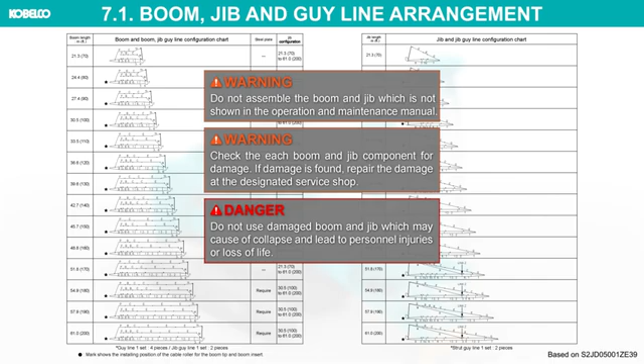As for the luffing crane specification, place the steel plates between the ends of the crawler and the ground when erecting or lowering a boom if the boom length is 54.9 meters or longer as shown. When placing the steel plate, travel the crane forward until the idler center comes to the center of the steel plate.

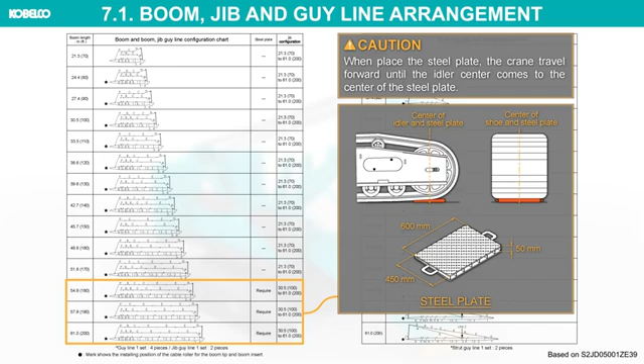This video describes the following attachment configurations. Boom, 21.3 meters. Jib, 21.3 meters. Hook, 35-ton hook, 2 parts, plus ball hook, 1 part.

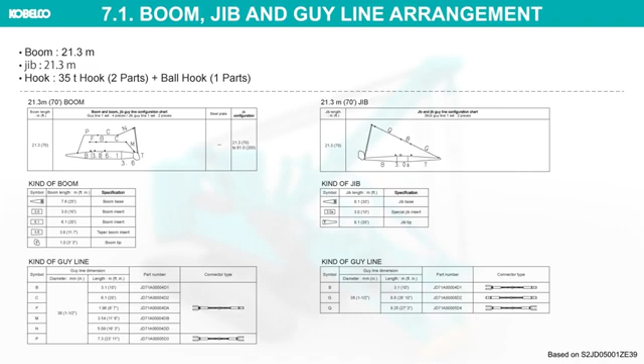Caution for cantilever. Ensure to work with the gantry set at work position, and the inching switch should be set in inching position. Do not exceed the cantilever limitation. Do not perform the hoisting work or travel while the boom is supported with the cantilever.

Hoisting a boom until the boom tip is cleared off from the ground will lead to damage to the boom. If the pinholes located in the lower sections of the booms to be connected are aligned, the boom should not be hoisted further.

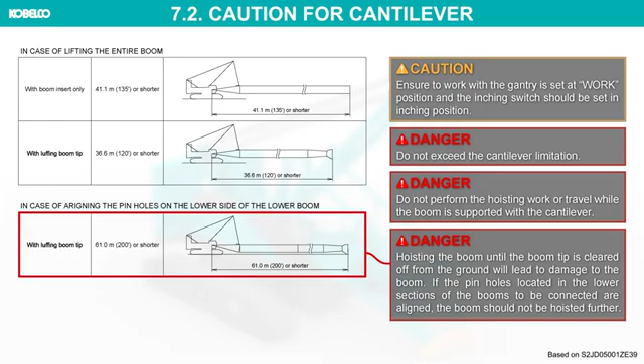Assembling the luffing attachment. This assembly procedure starts from the machine under the following conditions. Do not lower the boom base tip below ground level, otherwise the boom and/or backstop will interfere with surrounding components and lead to damaged parts.

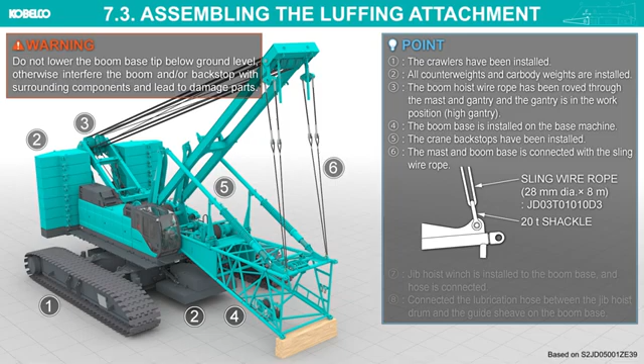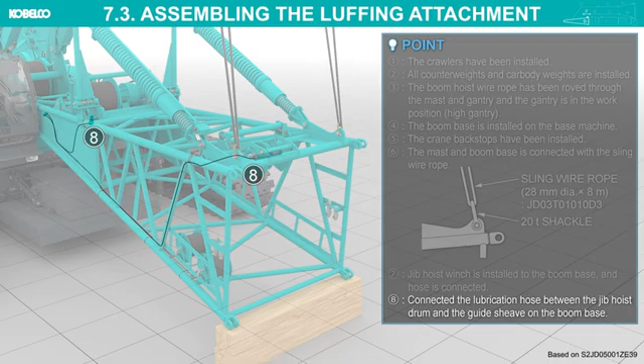Jib hoist winch is installed to the boom base, and hose is connected. Connect the lubrication hose between the jib hoist drum and the guide sheave on the boom base. Fold the guide sheave and guide roller on the boom base.

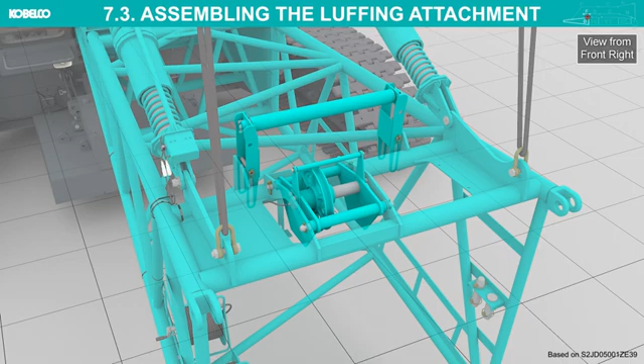Prepare the required boom components, paying attention to the up-down face of insert booms, and place them near the boom base section. Do not place the attachment directly on the ground. Place a wooden block and place the attachment stably on it. Attach the sling to the boom insert.

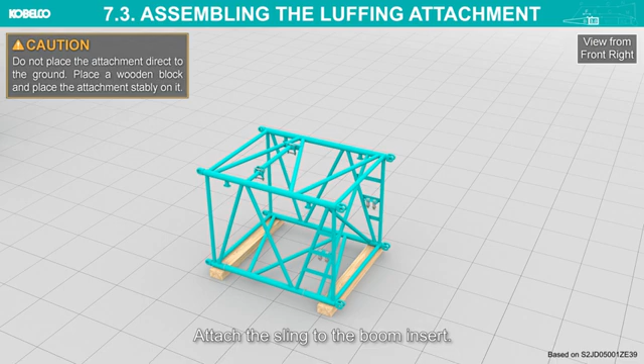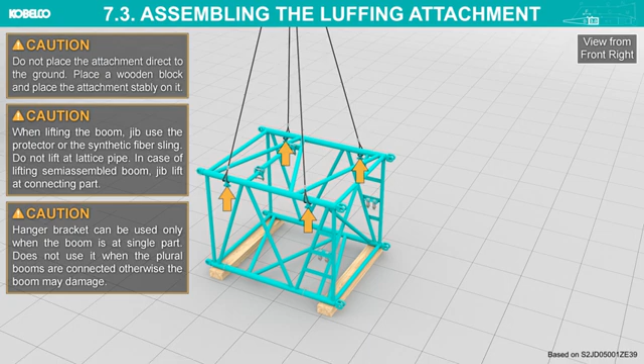When lifting the boom or jib, use the protector or the synthetic fiber sling. Do not lift at the lattice pipe. In case of lifting a semi-assembled boom or jib, lift at the connecting part. The hanger bracket can be used only when the boom is a single part. Do not use it when plural booms are connected, otherwise the boom may be damaged.

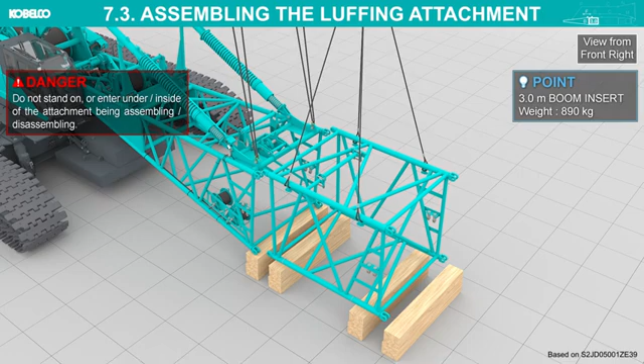Lift the boom insert and position it near the boom base. Do not stand on, or enter under or inside the attachment being assembled or disassembled. Align the top side pinholes. Insert the connecting pins into the top side pinholes.

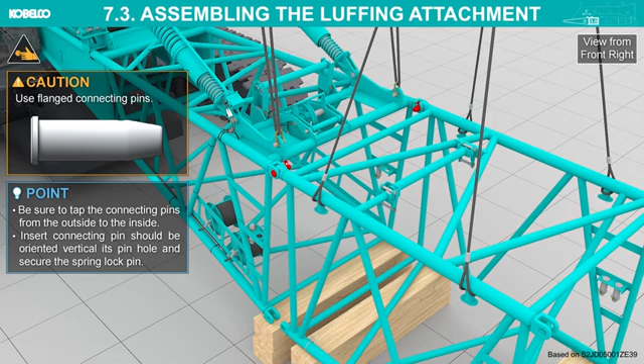Use flanged connecting pins. Be sure to tap the connecting pins from the outside to the inside. The inserted connecting pin should be oriented vertical to its pinhole; secure the spring lock pin. Detach the slings. Connect the rest of the boom inserts according to the boom configuration chart.

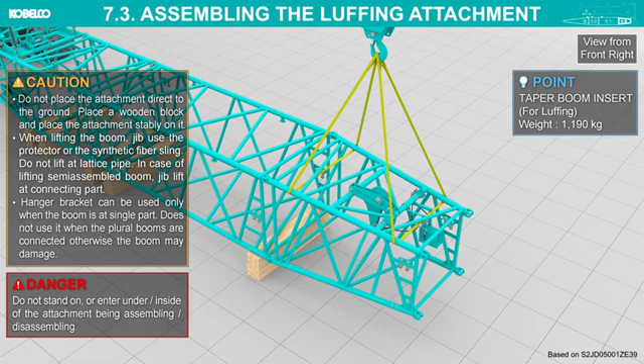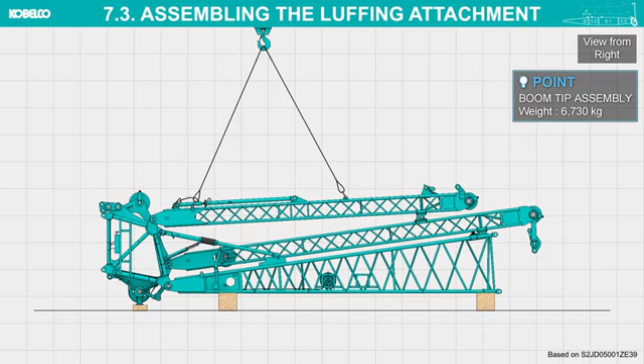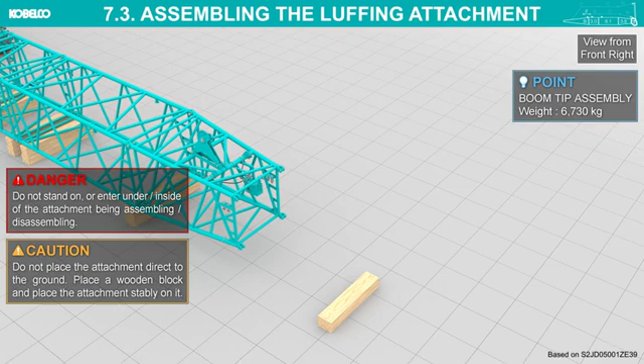Fold the idler sheave at the taper boom insert. Attach the sling to the boom tip assembly. Lift the boom tip assembly and connect it to the taper boom insert. Install or extend the cable rollers.

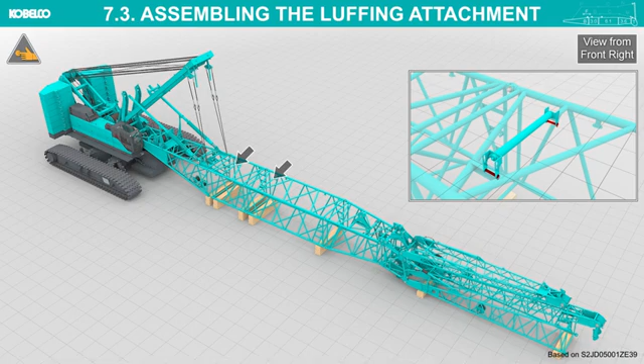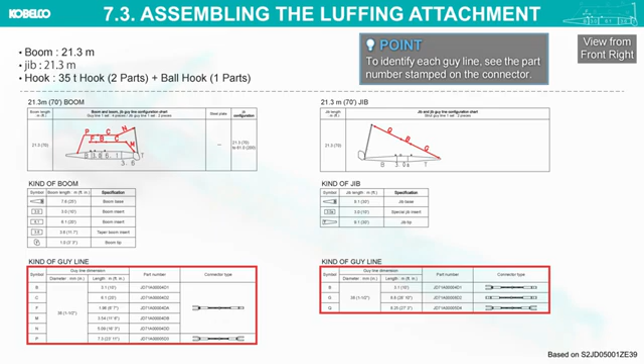Prepare the guy lines according to the arrangement chart. To identify each guy line, see the part number stamped on the connector. Lift the guy lines and connect them to the top end of the boom tip. Spread the split pins 60 degrees apart, 30 degrees to each side. Do not bend just one side 60 degrees.

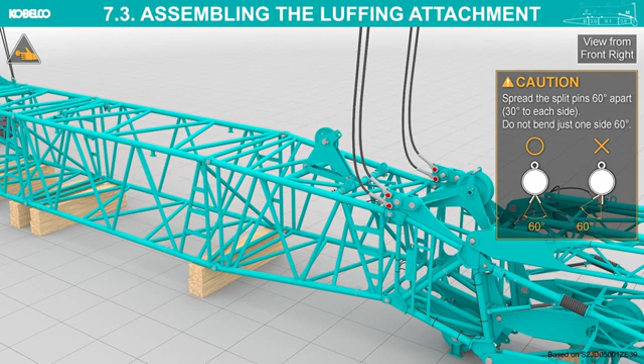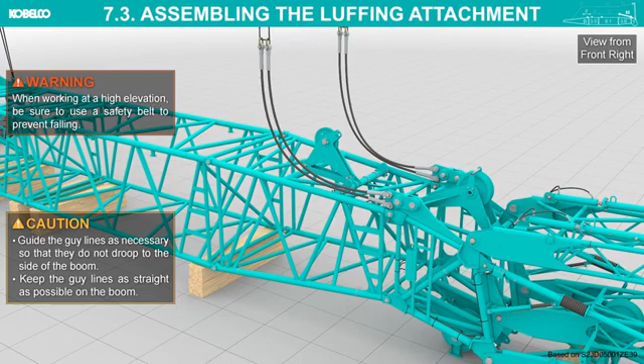Lower the guy lines onto the boom. When working at a high elevation, be sure to use a safety belt to prevent falling. Guide the guy lines as necessary so that they do not droop to the side of the boom. Keep the guy lines as straight as possible on the boom. Connect the rest of the guy lines according to the boom configuration chart. Insert the guy line connecting pin from the inside.

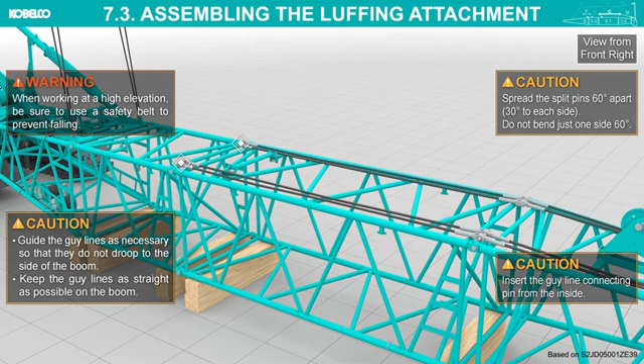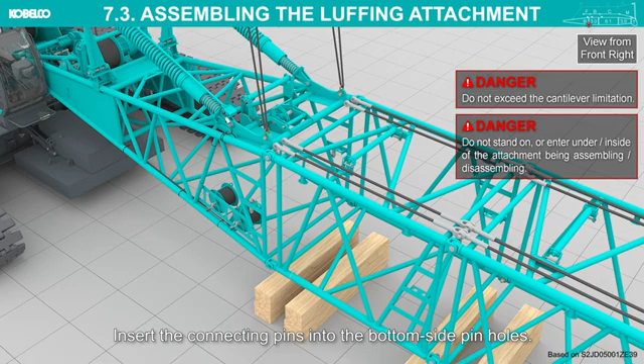Lift the boom base up by raising the mast so that the lower connecting holes of the boom base and boom insert align. Do not exceed the cantilever limitation. Insert the connecting pins into the bottom side pinholes. Use double-tapered connecting pins.

Attach a sling to the top of the rear strut and hold it with the assist crane. Remove the securing pin that connects the front and rear strut and lift the rear strut. Place a wooden block and lower the rear strut.

Attach a sling to the top of the front strut and hold it with the assist crane. Remove the securing pin that connects the front strut and lift the front strut. Place a wooden block and lower the front strut.

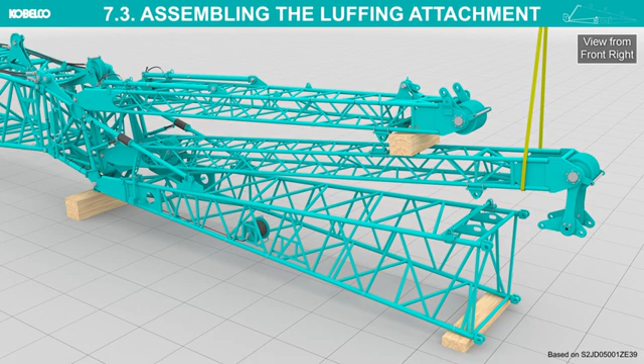Ensure that the links are high enough so that they do not interfere with each other when connecting the insert jib. Assemble the jib in accordance with the jib configuration chart.

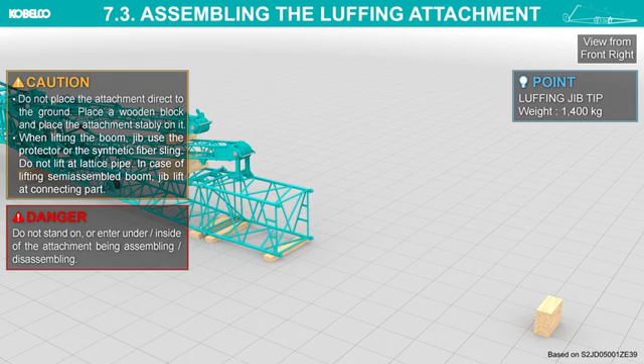Install an auxiliary sheave to the jib tip. Align the pinholes on the lower side and install the securing pins. Detach the sling.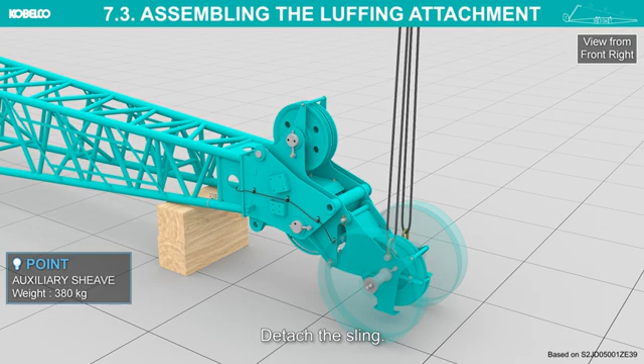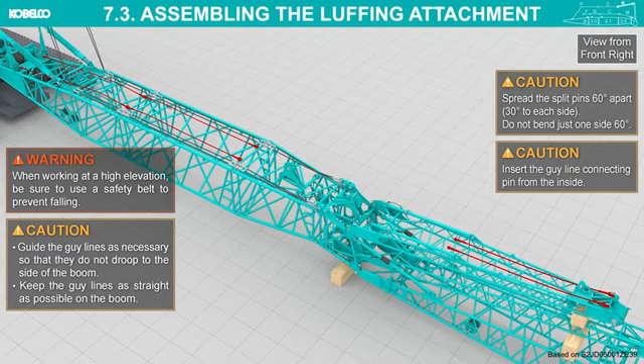Connect jib guy lines, boom side, from boom base side step by step on the boom. Lower the mast and remove the slings. When working at a high elevation, be sure to use a safety belt to prevent falling. Use a scaffolding board for working on the attachment.

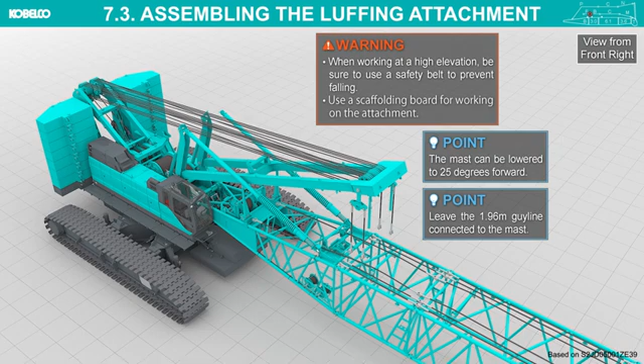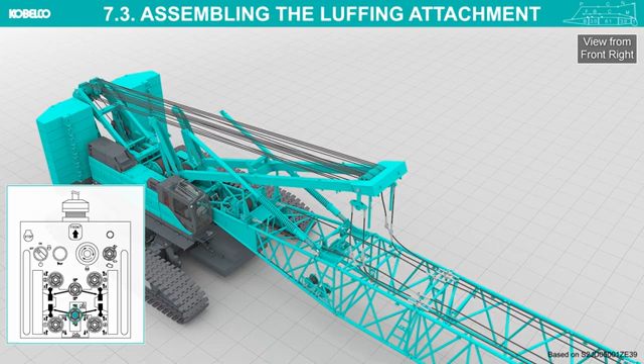Connect guy lines, of which guy lines 1.96 meters installed on the mast, and the guy lines coming from the boom tip. Fully lower the mast assist arms. Hoist the boom hoist drum to draw the guy lines taut. Place a signalman to prevent accidents from the rotating drum. Stop hoisting the boom hoist wire rope just before the boom tip leaves the ground.

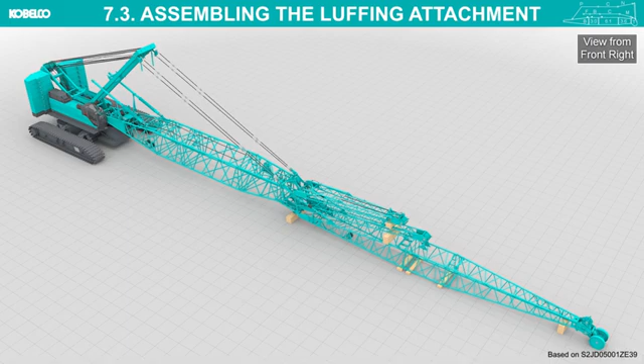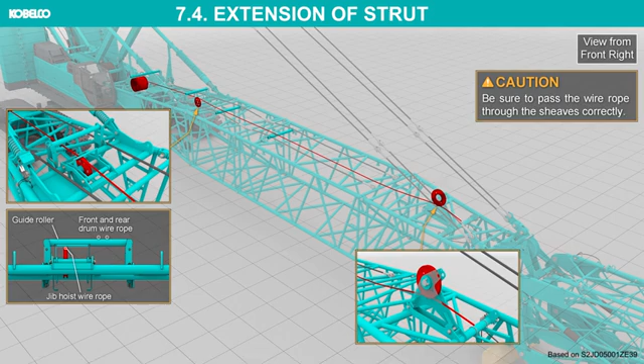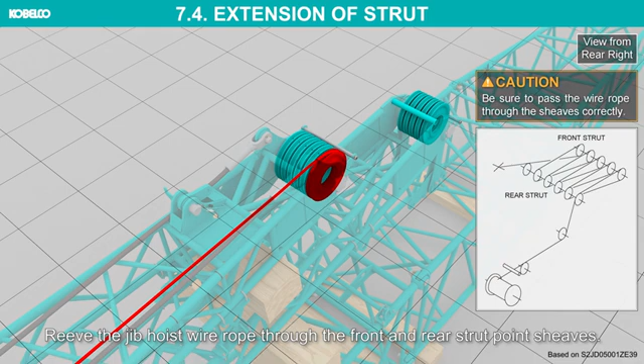Extension of strut. Pay out the jib hoist drum wire rope. Be sure to pass the wire rope through the sheaves correctly. Reeve the jib hoist wire rope through the front and rear strut point sheaves. Install the rope socket on the end of the wire rope and secure it to the rear strut.

Attach the sling to the rear strut. While paying out the jib hoist wire rope, lift the rear strut with the assist crane. Connect the jib guy line C to the boom guy line N. Raise the rear strut forward until the strut backstop can be taken out.

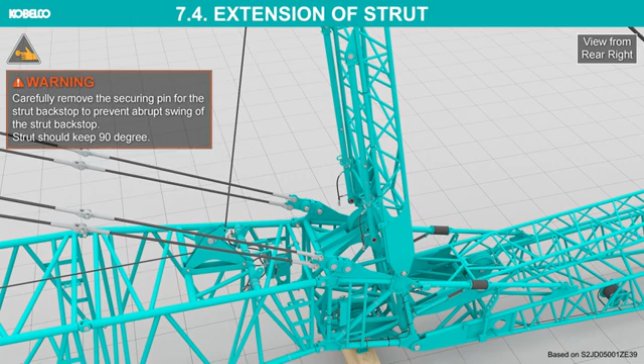Remove the securing pin that connects the rear strut and strut backstop. Carefully remove the securing pin for the strut backstop to prevent abrupt swing of the strut backstop. The strut should keep 90 degrees. Connect the strut backstop to the boom side while folding down the rear strut.

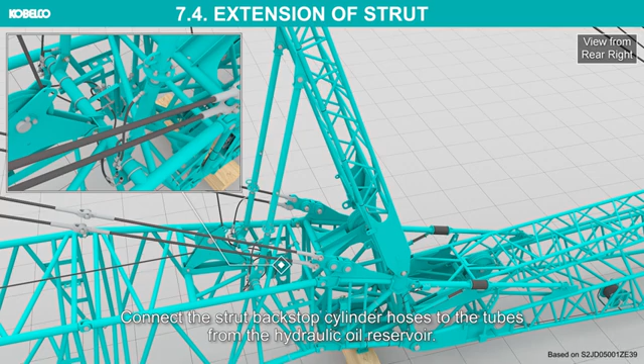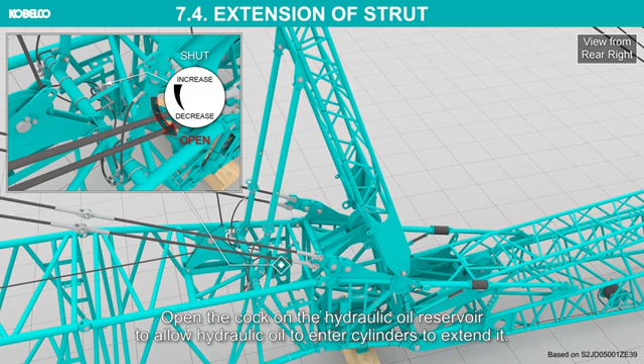Connect the strut backstop cylinder hoses to the tubes from the hydraulic oil reservoir. Open the cock on the hydraulic oil reservoir to allow hydraulic oil to enter the cylinders to extend them. Set the length of the strut backstop appropriately according to the boom length in use. Set the strut backstop length adjusting pin at the correct position according to the boom length. If the adjusting pin is set at the incorrect position, it may result in serious accidents, such as damage or drop of the boom, etc.

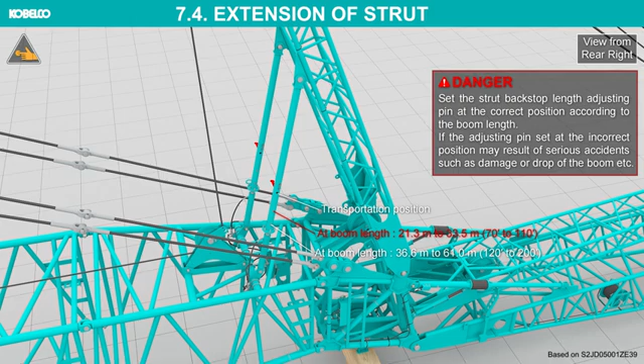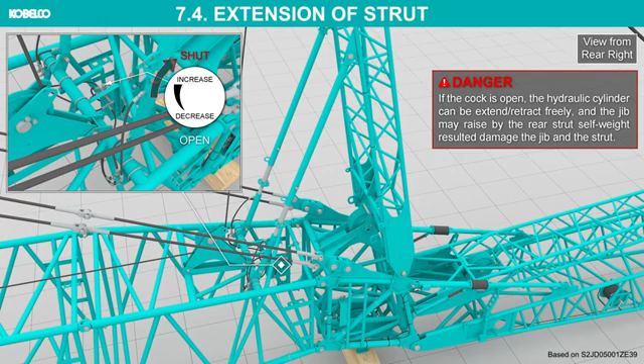Securely tighten the cock on the hydraulic oil reservoir. If the cock is open, the hydraulic cylinder can retract freely, and the jib may raise by the rear strut self-weight, resulting in damage to the jib and the strut. Make sure that the jib backstop is working properly. Support the jib backstop with an assist crane and sway the jib backstop by hand. Confirm the tip of the jib backstop does not come off from the stopper of the jib base.

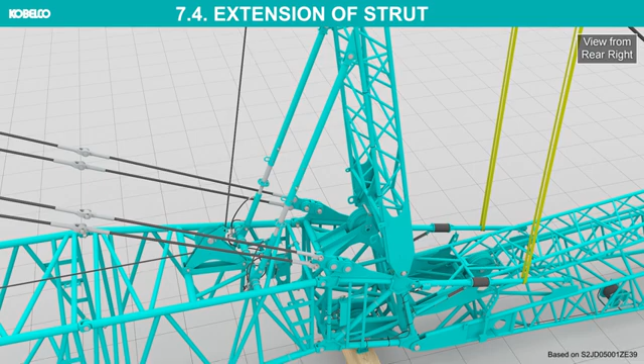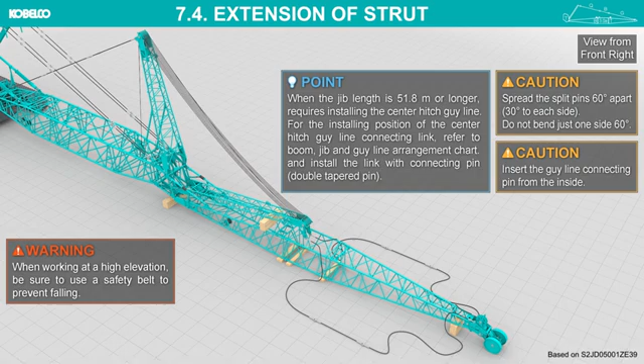Connect the jib guy line Q to the guy line link on the front strut. Connect the remaining jib guy lines in order, starting from the jib tip. When the jib length is 51.8 meters or longer, installing the center hitch guy line is required. For the installing position of the center hitch guy line connecting link, refer to the boom, jib and guy line arrangement chart and install the link with the connecting pin, double tapered pin. Hoist up the jib drum and raise the front strut.

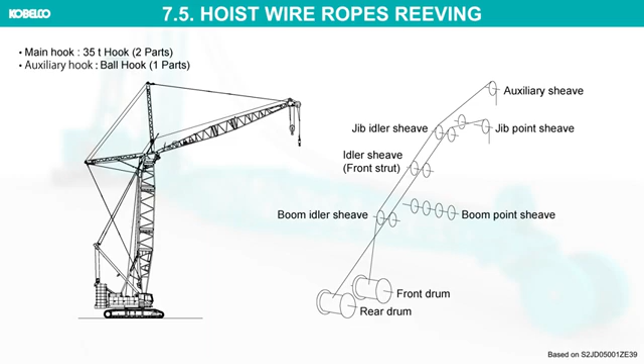Hoist wire ropes reeving. This chapter explains how to assemble the jib tip with 2 hooks. Place the hook over hoist limit switch, weight and socket, near the jib tip. When passing the hoist wire rope to the hook block, face the striker, the hook block side weight catch contacting the hook over hoist limit switch weight, to the boom foot side.

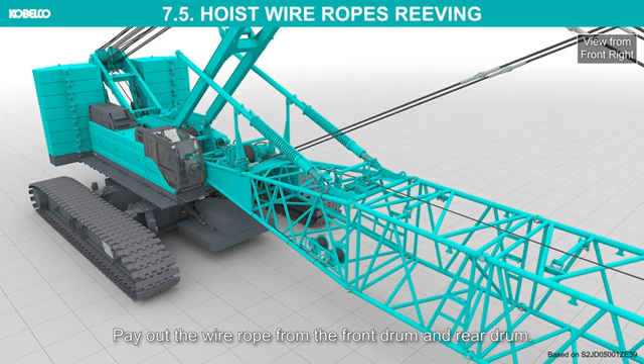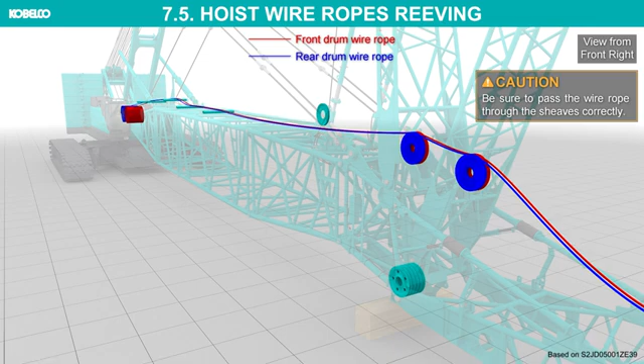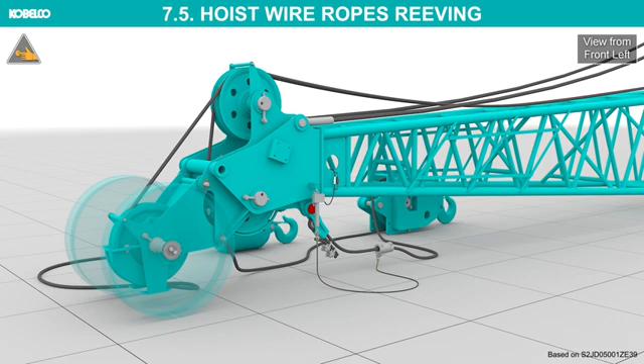Pay out the wire rope from the front drum and rear drum. Be sure to pass the wire rope through the sheaves correctly. Reeve the rear drum wire rope through the jib point sheave and hook sheave in order. Install the limit switch and pass the wire rope through it. Install the rope socket and secure the end of the wire rope to it. Install the rope socket in the correct direction.

Install the limit switch and pass the wire rope through it. Install the rope socket and secure the end of the wire rope to it.

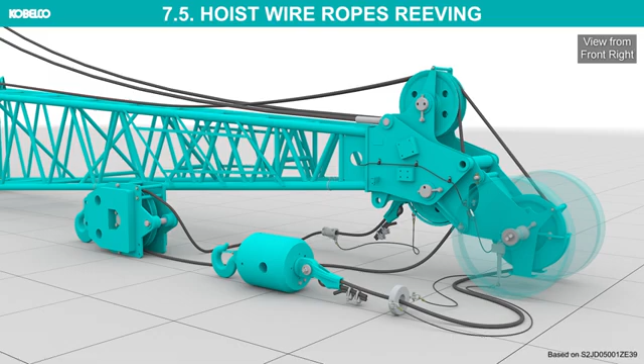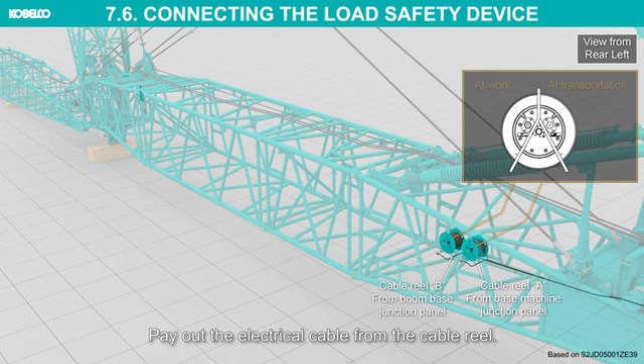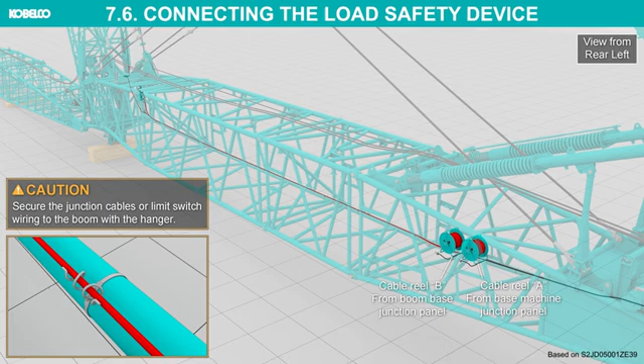Connecting the load safety device. Disconnect the cables from the cable reel on the boom base. Pay out the electrical cable from the cable reel. Secure the junction cables or limit switch wiring to the boom with the hanger. Connect the cable of cable reel A to the boom tip junction panel.

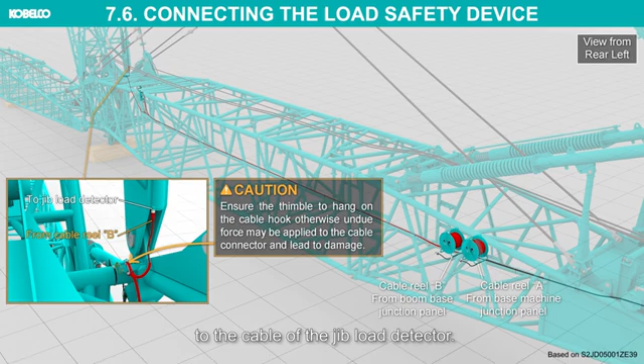Ensure the thimble hangs on the cable hook, otherwise undue force may be applied to the cable connector and lead to damage. The cable of cable reel B should be connected to the cable of the jib load detector. Engage the cable reel stopper once enough cable has been paid out. Connect the cable to it. Work on cable reel.

Disconnect the cables from the cable reel on the jib base. Pay out the electrical cable from the cable reel. Secure the junction cables or limit switch wiring to the boom with the hanger. Connect the cable of the cable reel to the jib tip junction panel.

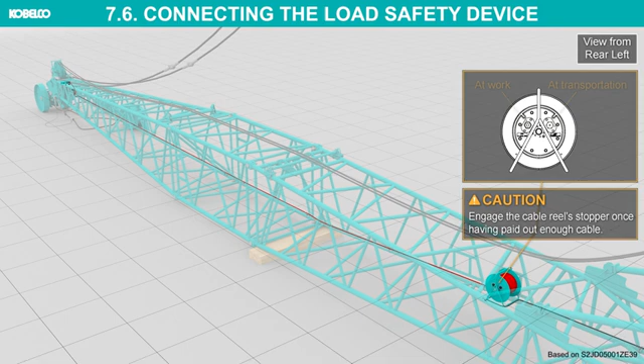Engage the cable reel stopper once having paid out enough cable. Connect the cable to it. Work on cable reel. Check the connection of the load detector connector.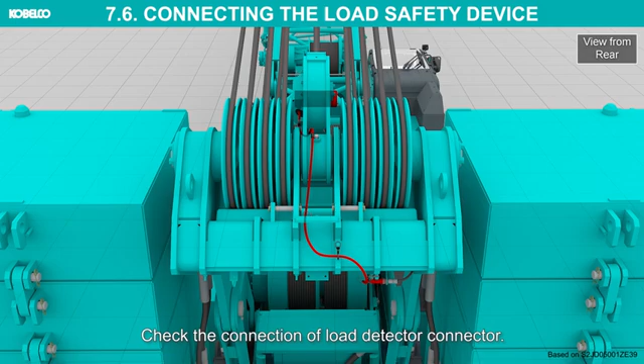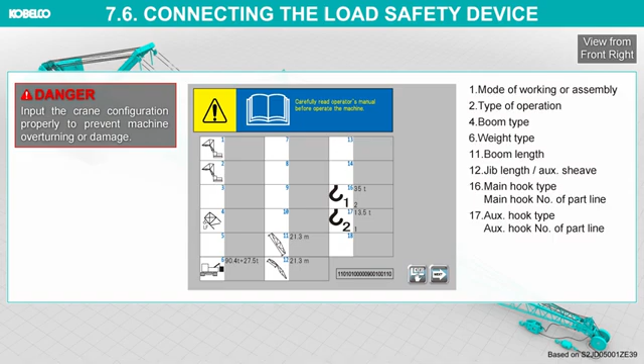Set the crane configuration into the controller. Input the crane configuration properly to prevent machine overturning or damage. Confirmation before erecting the attachment. Check the following items and confirm that there is no abnormality, then erect the boom.

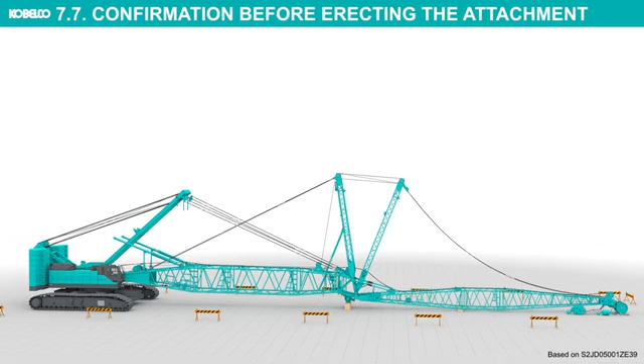The ground must be level and firm. Improve the ground condition if required by placing steel plate below the whole machine. Pre-operational check completed. Boom backstop extended to work position. Lubrication to the required part of the attachment performed. Wire ropes correctly reeved.

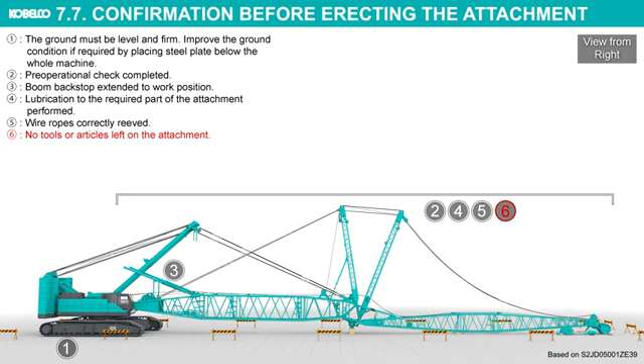No tools or articles left on the attachment. Mast assist arms are in the fully lowered position. Aux actuator select switch is in the off position. Off-limit signs posted at surrounding area of the attachment. Wiring for the boom, main and auxiliary hook overhoist limit switches properly connected. Limit switches function.

Load safety device correctly wired. Proper crane configuration data set, proper hook mode selected. The strut backstop length is set at appropriate position, and the cock on the hydraulic oil reservoir is surely closed. Travel motor set to rear side. The steel plates are placed at the front end of the crawler, if it's required.

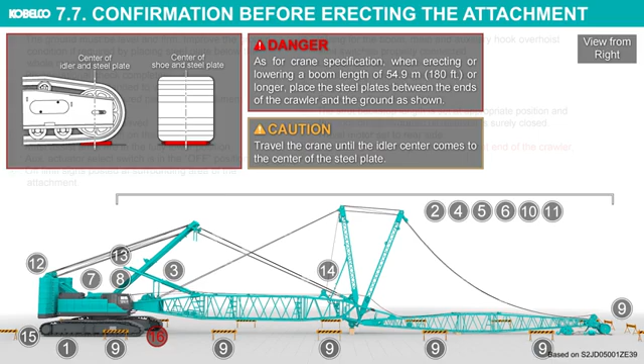As for crane specification, when erecting or lowering a boom length of 54.9 meters or longer, place the steel plates between the ends of the crawler and the ground as shown. Travel the crane until the idler center comes to the center of the steel plate. Erecting the luffing attachment.

Do not stand or work under, inside or on the boom structure to prevent accident due to sudden fall of the attachment. Do not perform the erection of the luffing boom and its jib while strong wind is blowing to prevent overturning. To prevent from being dragged or struck by a suddenly moving hook, stay off from the hook when the attachment is erected. Operate the control lever slowly.

Abrupt control lever operation is very dangerous and may create unexpected loads to the base machinery and the attachment or load swinging. When erecting or lowering the attachment, the upper machine should be directed parallel with the crawler. Not allowed with the overside direction. Ensure that the ground is level and no obstacles in the area where the jib point roller moves. Take an action to keep all unrelated personnel off.

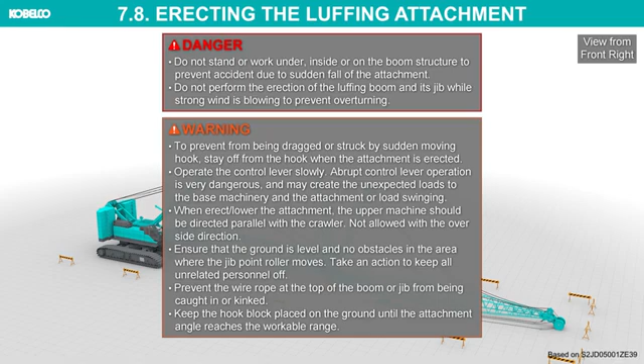Prevent the wire rope at the top of the boom or jib from being caught in or kinked. Keep the hook block placed on the ground until the attachment angle reaches the workable range. Turn the boom hoist lever to the hoist position to raise the boom at a low speed. Remove the wooden block under the attachment. Raise the boom further until the jib point lifts off the ground.

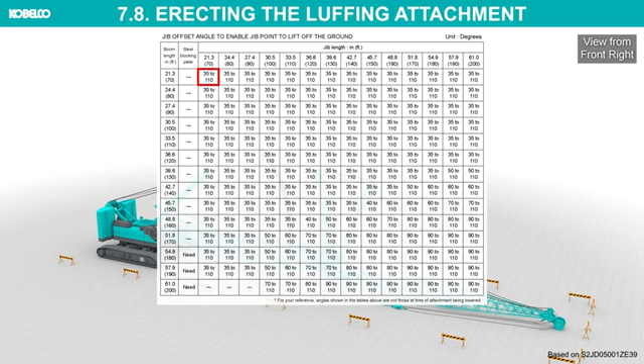To give a margin for machine stability and to reduce the load on machine, erect the boom with jib offset angle set between 35 to 110 degrees. Move the jib hoist drum control lever to the lowering position, and pay out the jib hoist wire rope paying attention to the jib guy lines, so that they do not become excessively slack. If the jib guy line becomes excessively slack, the connector of the jib guy line slips on the top surface of the jib, leading to damages on the lattice pipe.

While erecting the attachment, front and rear drum control levers are to be operated to pay out the wire rope from the drum so that the hook block does not leave the ground until the attachment is in the working range. Take care not to erect the front strut excessively. Otherwise, it interferes with the rear strut, leading to damages on the struts.

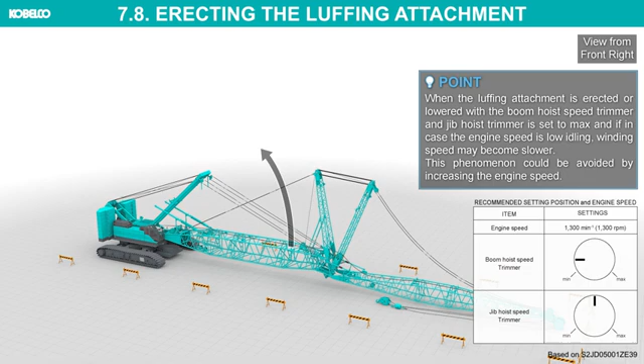When the luffing attachment is erected or lowered with the boom hoist speed trimmer and jib hoist trimmer set to max, and in case the engine speed is low idling, winding speed may become slower. This phenomenon could be avoided by increasing the engine speed. After the attachment reaches the appropriate offset angle, set the luffing control lever to the raising position to remove slack in the jib guy lines.

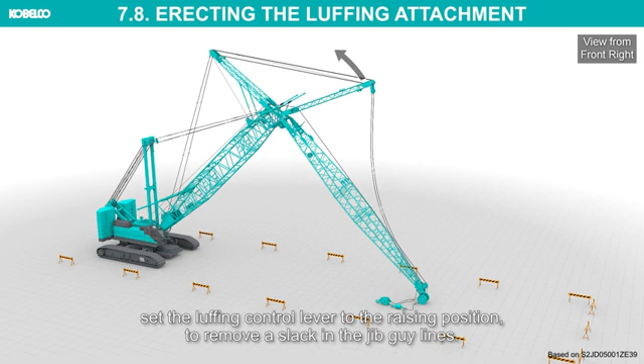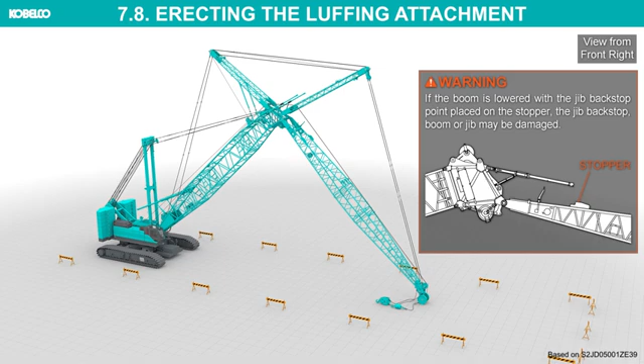In case of lowering the luffing boom before the jib point leaves the ground, pay attention to the position of the jib backstop and support. If the boom is lowered with the jib backstop point placed on the stopper, the jib backstop, boom or jib may be damaged.

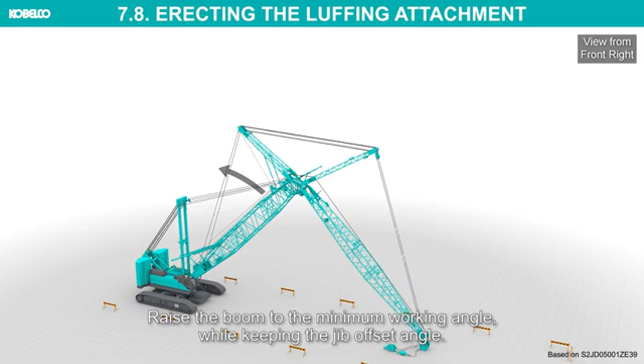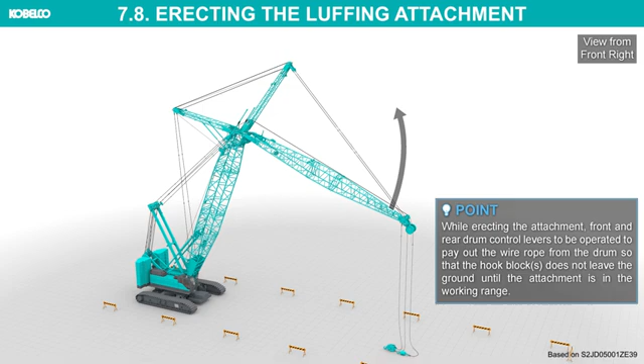Raise the boom to the minimum working angle while keeping the jib offset angle. Erecting the jib before the boom angle reaches the minimum working angle may cause overturning or damages to the crane. Raise the jib to the minimum working angle. Hoist up the hook. After completing erecting the luffing attachment, check the operation of each limit switch.